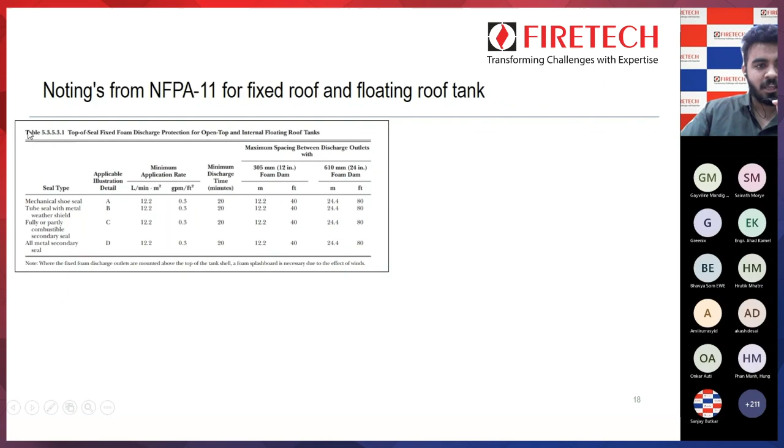So another noting of NFPA 11 for fixed roof and floating roof tanks. That was about fixed roof tanks, and this noting is about open top or floating roof tanks. Here also this table gives us the minimum application rate, the minimum discharge time, and the number of discharge devices to be used in case of the floating roof tank. So in a fixed roof tank, we need to refer to two tables, but in case of a floating roof tank, we only need to refer to this table, that is 5.3.5.3.1.

So based on the seal types, there are various types of sealing which are done in case of the floating roof tank. Your application rate remains the same for all types of seals, and your discharge time also remains the same. But your number of discharge devices differs. This 12.2 meters given here is the maximum spacing which needs to be there between two discharge devices, the foam makers, while you are designing for the floating roof tank.

That is if your foam dam is 305 millimeter, but this is not used every time. If you see a standard floating roof tank, your foam dam is 610 millimeter. So you have to refer to this standard, that is 24.4. 24.4 meters must be the spacing between two discharge outlets in case of the floating roof tank.

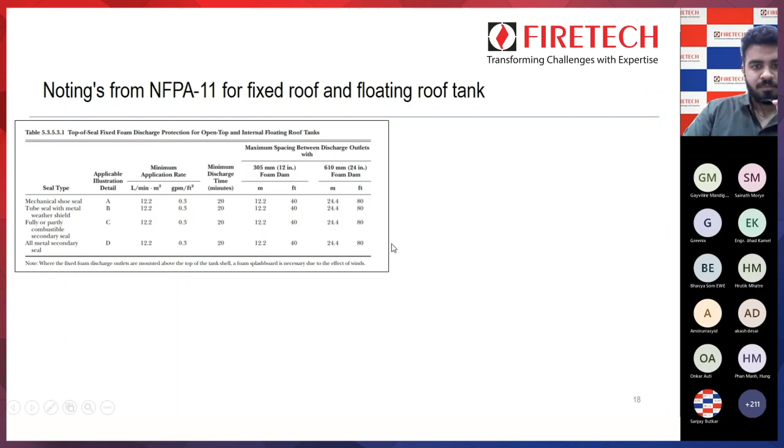So these are some notings from OISD 117. Earlier we have understood the notings from NFPA 11, which are required for the design of fixed roof and floating roof tanks. Now we will understand OISD 117. So here there are two notings.

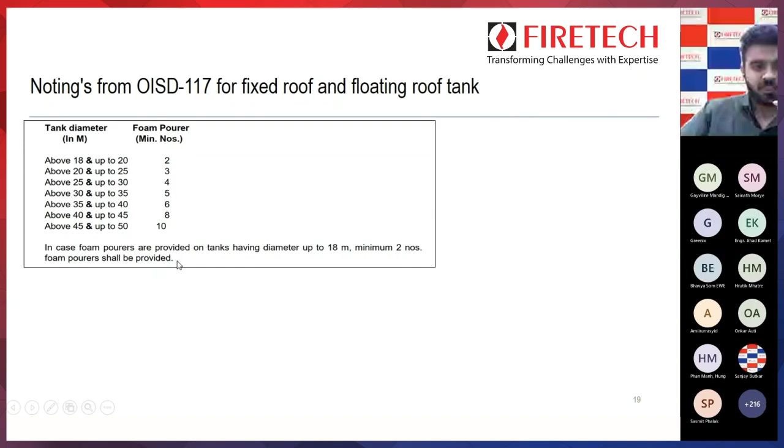One is, based on the tank diameter, these are the number of discharge devices which need to be used. So here also you will note that as your diameter goes on increasing, your discharge devices also go on increasing. And this is a small noting which we also have to keep in mind: in case foam pourers are provided on a tank having diameter up to 18 meters, a minimum of 2 foam pourers shall be provided. So this is also an important noting which we should keep in mind while designing the fixed foam system for a fixed roof tank.

So this is the duration for foam discharge. Based on the classes, that is class A and class B, the duration differs. For tanks containing class A and class B liquid, 65 minutes is the duration which needs to be followed. And where the system's primary purpose is spill fire protection, then 30 minutes. So this refers to your dike protection.

So in case a boilover condition occurs and oil from a storage tank spills in the dike area, then your dike area MEFGs get actuated. And in that case, for the MEFG calculations, you have to use the minimum discharge time of 30 minutes.

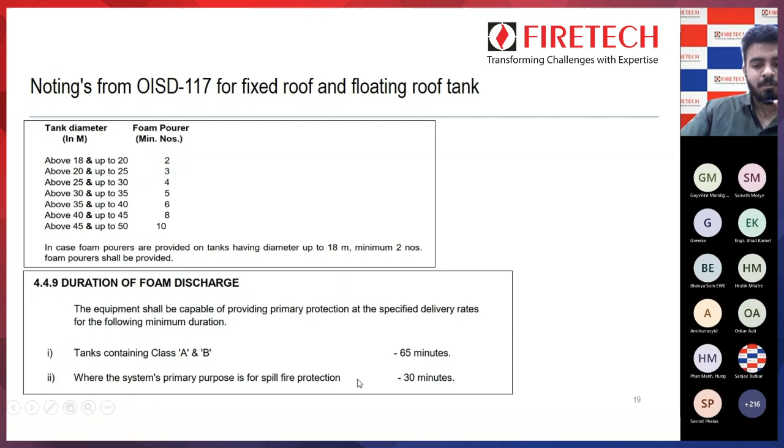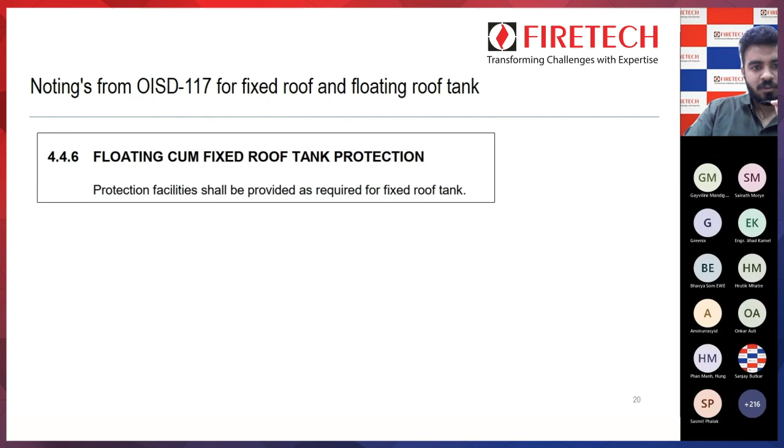So these are some other notings of OISD 117 which need to be followed for the floating roof tank. So these are the two notings. Here it is given that floating cum fixed roof tank protection facilities shall be provided as required for the fixed roof tank. So this noting in the OISD, written in 4.4.6, says that we have to follow the same process as for a fixed roof tank. This is the noting that an internal floating roof tank is called a fixed roof tank. So this is the noting from OISD which tells us that.

And this is another noting from 4.4.3: foam makers or foam pourers shall be located not more than 24 meters apart on the shell perimeter based on a 600 mm foam dam height. So that is the same noting which we found earlier in NFPA. In case of the floating roof tank, if your foam dam height is 600 millimeters, then your distance between two discharge devices shall be not more than 24 meters. And a minimum of 2 foam pourers shall be provided in any case.